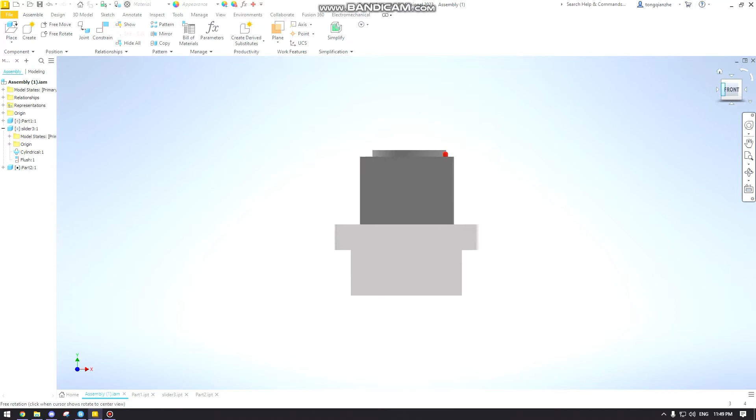So I will start off by going through with the main body. The main body actually houses the charging dock as well as the slider itself. So once the main body is being fixed onto the underside of a tabletop, the microphone dock will then slide in from the bottom through this opening, which is the inner rectangle that you see here.

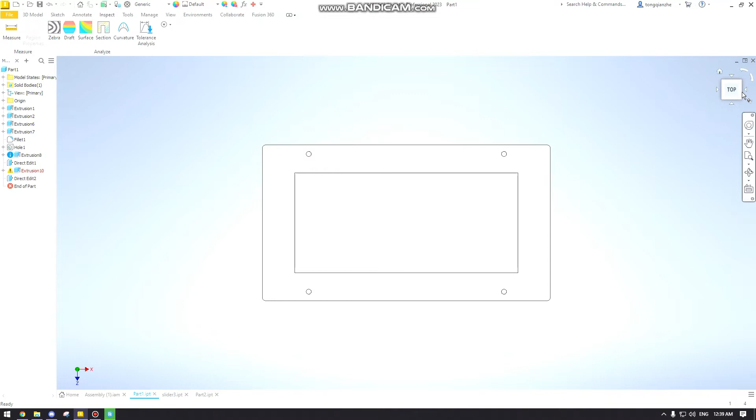Then the slider will then slide in through this rectangular opening over here. And what the slider does is that it provides stability and power to the charging dock. As for the dimensions, the total length is 15.5 cm long and the height is 4.2 cm tall.

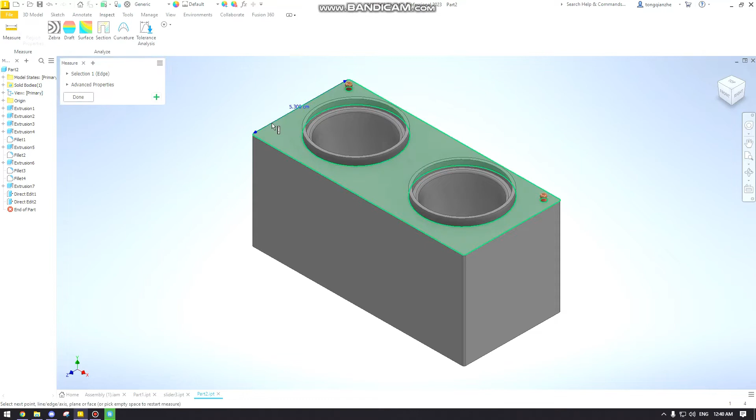Moving on to the charging dock itself that comes as standard, there will be two red LED lights at the two corners, which represent the charging status of the microphones, and it can also hold and charge up to two microphones simultaneously. So the overall dimension of the dock is 12 cm in length and 5.9 cm in totality for the height.

And lastly for the slider. So this slider will act as a base for the charging dock to rest on and provide power for the charging dock through contact between the gold color pad and the pogo pins on the charging dock. The slider also has two little knobs at the bottom protruding out over here. So these two little knobs act as a catch to keep the slider in place. These two little knobs will be aligned and synced in nicely into the two holes on the track of the main body.

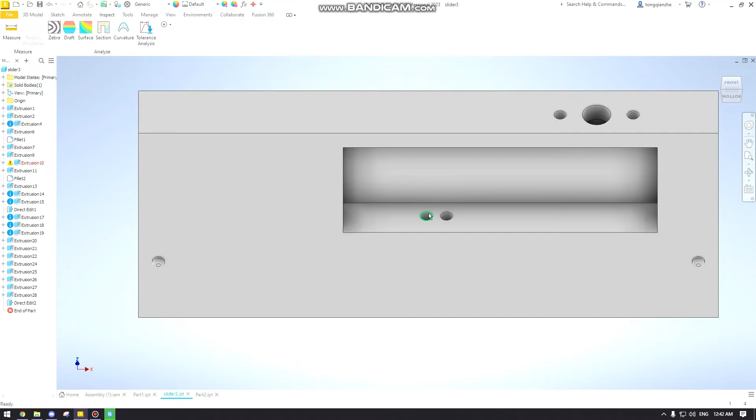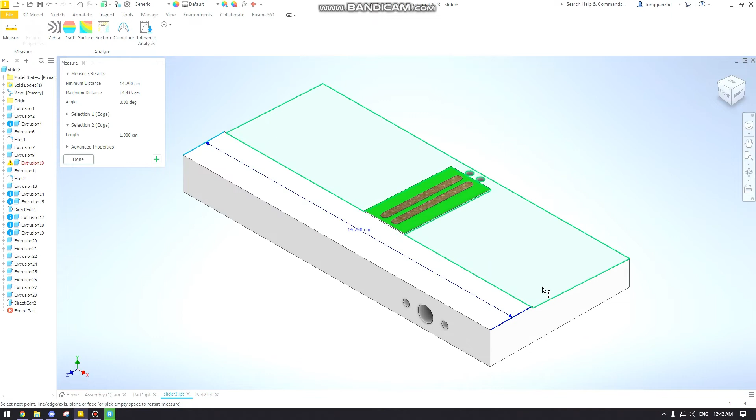And the holes and the opening that you see here is to house the 5V female connector, and these two holes over here are used to run the power cable through, which will then exit from the back over here, which then comes out at the top and is soldered onto the board itself. As for the dimension, the total length would be 14.29 cm and the height is 1.9 cm.

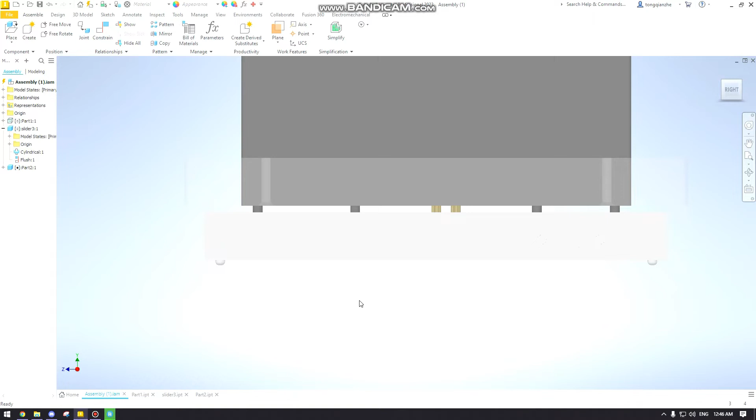So as mentioned earlier, the slider acts as a base as well as providing power for the charging dock, this is what I meant. So there will be legs at the bottom of the charging dock, of which two will be in contact with the slider, and not forgetting the pogo pins as well. So from the side, it looks like this. In the middle, there's the gold color pogo pins and the two stands at the back that will be in contact with the slider itself.

And to give a closer look at the two little knobs that are used to keep the slider in place, this is what it looks like.

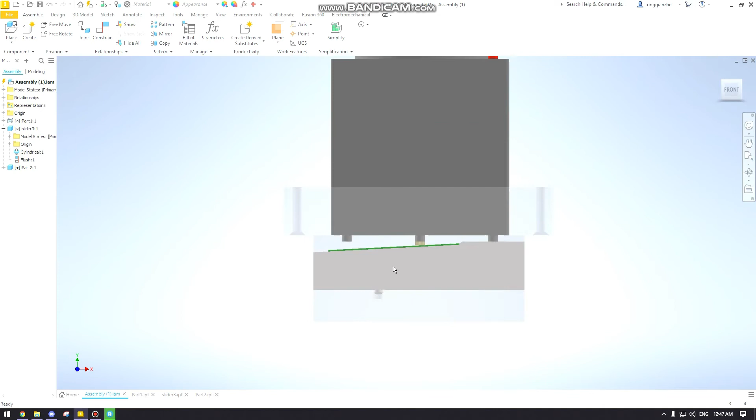And how does the slider provide power to the charging dock? So once the 5V connector is connected, we will then slide in the slider. Then the board, which is in green, that is resting on this angled surface will come into contact with the pogo pins. So once everything is installed nicely, everything will be housed within the main body itself.

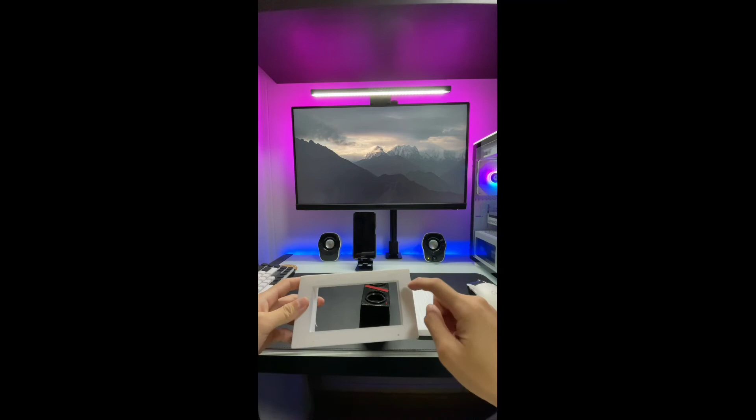So to demonstrate how the product works, it mainly consists of three parts: the main body, charging dock, and the slider. So on the main body itself, there are 4 screw holes that are used to install it on the underneath of a tabletop. So once that is done, you will take the charging dock and slide it through from the bottom and make sure that it is flush. Like so. And the protrusion of the charging dock would be 40 mm as stated in the proposed amendment.

After that, on the slider itself, there will be a board over here that is used to power the charging dock through the pogo pins. And at the back of this slider, there will be a 5V female connector over here, which will have the power cables running through these two holes, exiting from the back and through the top, which will then be soldered onto the board itself. Also, at the bottom of the slider, there are two little knobs that match the two holes on the track of the main body itself, which are used to keep the slider in place.

So once this is installed underneath the tabletop, all you have to do is take the slider and slide it in, which will then sit in nicely and flush, like so. Yep.